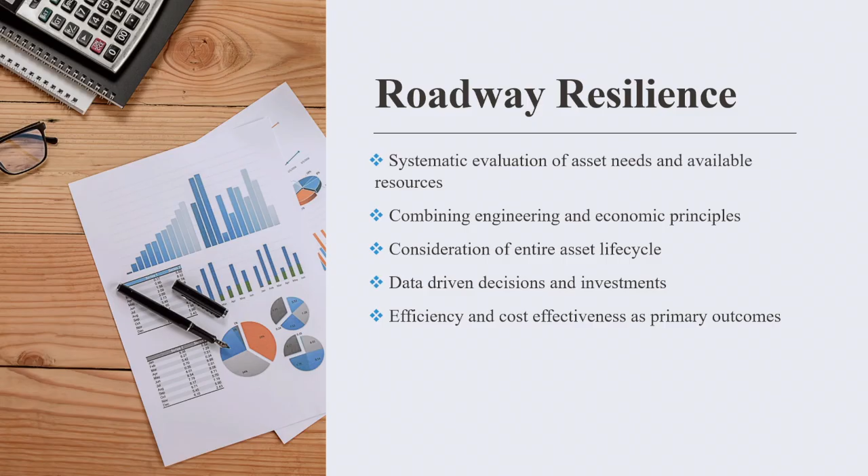Rationale for preservation, and I'll mention in a minute what's the correlation between preservation and maintenance versus resilience. But generally speaking, on the life cycle, as I stated, resilience is related to life cycle. So initial design is not the only factor, as I just mentioned. Quality control is not the only factor. We have to add any intervention that happens during the life cycle.

So basically, we are trying to achieve the highest possible service level, ensure that the funds available are used in preventative actions, not only corrective. That is what we talked about yesterday, and in the next presentation after this one, we will be talking about different types of preventative actions and their impact on the roadway network.

Timely action, again, as I said, one of the main advantages of pavement management systems or bridge management systems or asset management systems is giving us the ability to take the right decision at the right time. I mentioned earlier, yesterday or the day before, the right decision being delayed, right? So take the action while the damage is still minor.

Okay, types of maintenance, and again, the next presentation will be dedicated only to one type, which is preservation, but in our roadways, we have some of the normal routine maintenance, removal of debris. Somebody might say, okay, how is this related? This is a very simple thing. But you tell me, what do you think the non-removal of debris can do to impact long-term performance or even reduce the resilience of our road network? Anybody think of something here?

Perfect. Very smart. That is the major thing. Actually, 2 years ago, I did a project on how to optimize drainage for bridge decks. They started with bridge decks because they're very small, so they can control them faster than lengthy highways. And also the blockage of drains on bridges is even more scary because its impact will be immediate hydroplaning. The water has nowhere to go.

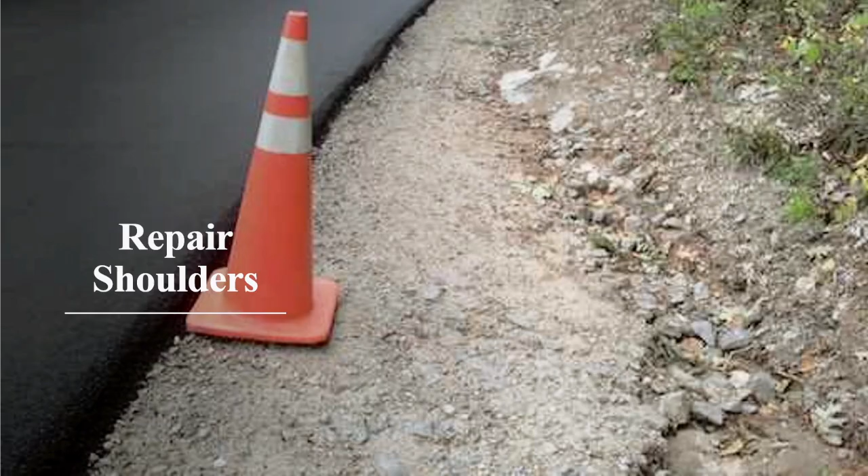So having a thicker layer of water on the bridge decks means hydroplaning, means accidents. So blockage of drainage is one major thing. So clearing the drains of the road network is one important activity. The repairs of shoulders. What can this do if you ignore the shoulders? Huh? The road will?

Perfect. One of the pictures for part of what happened yesterday, because there are two damages that happened yesterday, is relevant to the shoulder, ignoring the shoulder repair. They invested so much in the highway, but ignoring the shoulder, with some excessive rain, literally the road is gone. So, what year? It was like 2 years ago. Yeah, I'll show you the picture. I'll show you how the asphalt is brand new.

Now, that's what I'm saying. Somebody will be under fire in North Carolina in the next few days. I'm really watching what's happening in the news because taxpayers in America take it seriously. It's like, we're paying a lot of taxes, you're using them to create some infrastructure, and this is a major road, and it's eroded, or it collapsed.

Patching of potholes. Potholes in themselves are an indication of very poor preservation because you hardly see a pothole evolving immediately. The very first start is either a longitudinal crack or a transverse crack. And then it starts to develop hair cracks left and right, like a cobweb. And then not only this, it grows, so it's an alligator crack. And then not only this, you leave it for cyclic loading and fatigue, so the asphalt starts to pop. That is when the pothole shows.

So a pothole indicates that you ignored hair cracks, you ignored the expansion of the hair cracks, you ignored the alligator cracks until it developed. So it has been giving you signs and warnings, and nobody is listening. So this is one bad thing. And in the US, what scares them the most is ruts, which come after the potholes, because of safety, especially with very fast speed or high speed.

Cracks, as I said, are the first step to the formation of potholes. So the sealing of the cracks. Now this one, if ignored, as I said, will grow into further damage. And as we will see in the next presentation, sealing cracks is the first step. It's still considered under preservation because according to the FHWA definition, preservation would include any activity that does not increase

the capacity. And they're very precise about this because the pool of money they spend to do preservation is different than the pool of money they spend to do maintenance or repairs. So they have to define concisely what activities fall under preservation, so they know where to get the money from, and what activities fall under maintenance to get the money from this other pool.

So sealing of cracks is considered a surface treatment and a stage 1 into the routine maintenance, or, to put it a better way, routine maintenance is under preservation. The term is maintenance, but because it's routinely done, it does not include any increase in the capacity. So it falls under preservation.

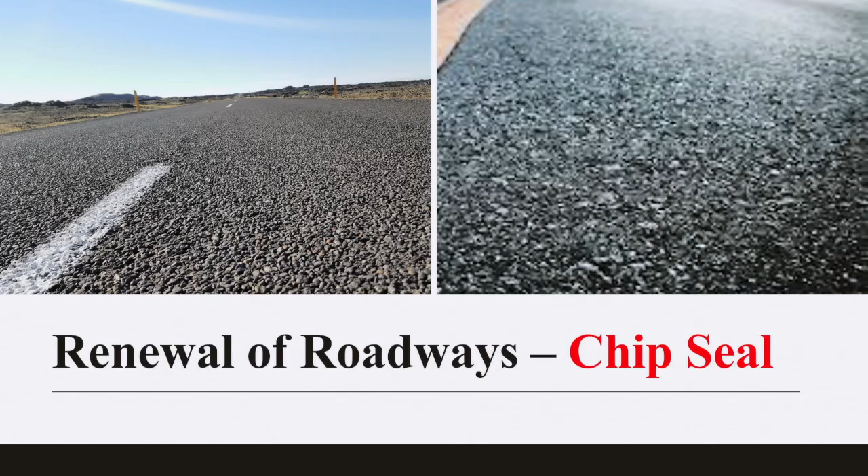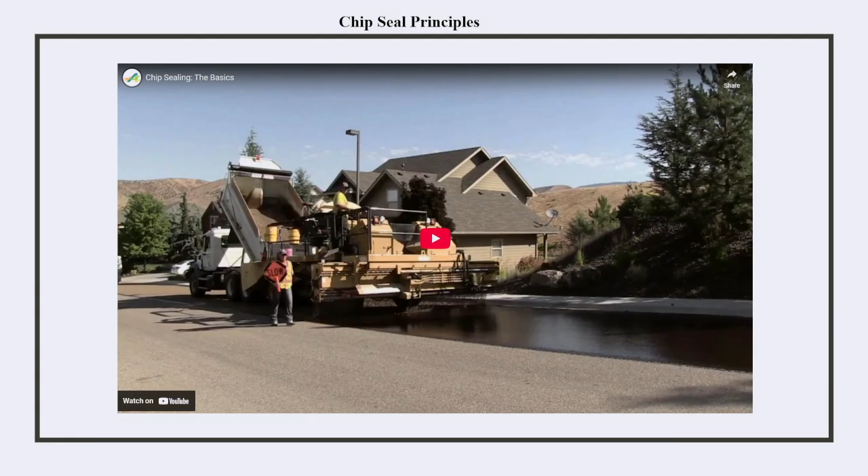Now, other types of maintenance: renewal of roadways or road surface, chip seal. If you guys can play the chip seal video, that will be good. It's actually repeated in the next presentation, so if we can't do it now, we can still... okay, that's good. So watch this one. I got a couple of questions yesterday about chip sealing, side questions.

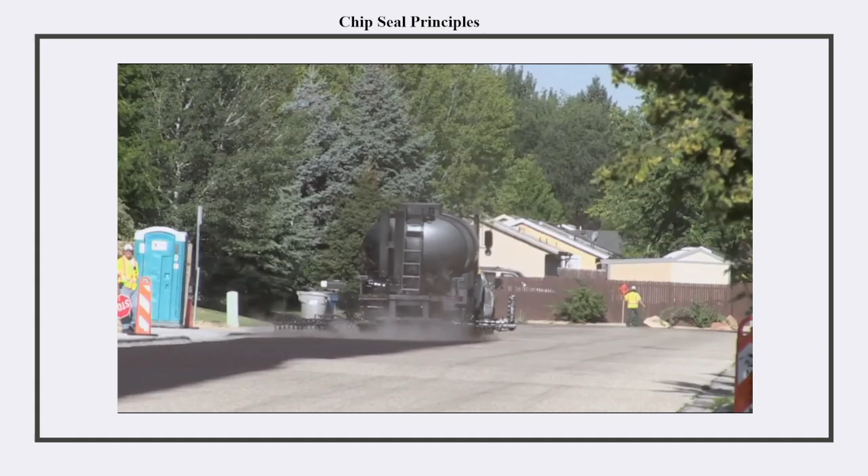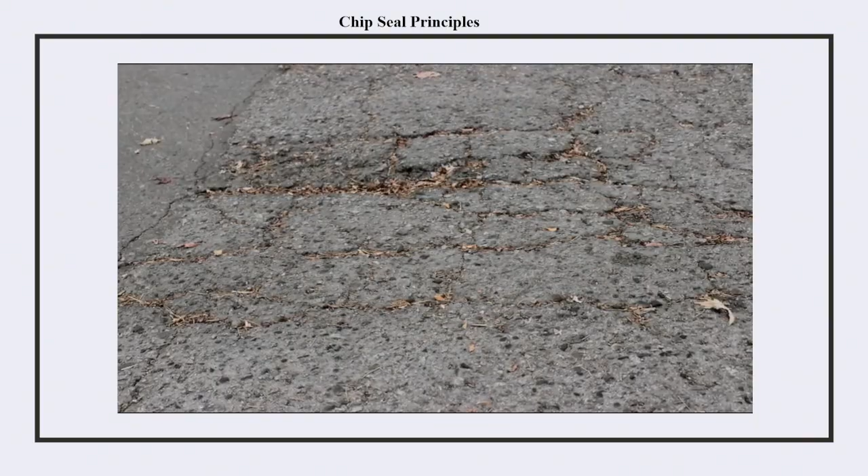Is this an evil conspiracy? What is chip sealing? Why does the Ada County Highway District continue to torment us? You usually find this unwelcome summer ritual sign on your door before they go chip seal your streets. Asphalt is like a protective skin covering our streets. Without treatment, it begins to decay from the effects of sun, weather, and traffic. It loses its elasticity, becoming brittle and cracked.

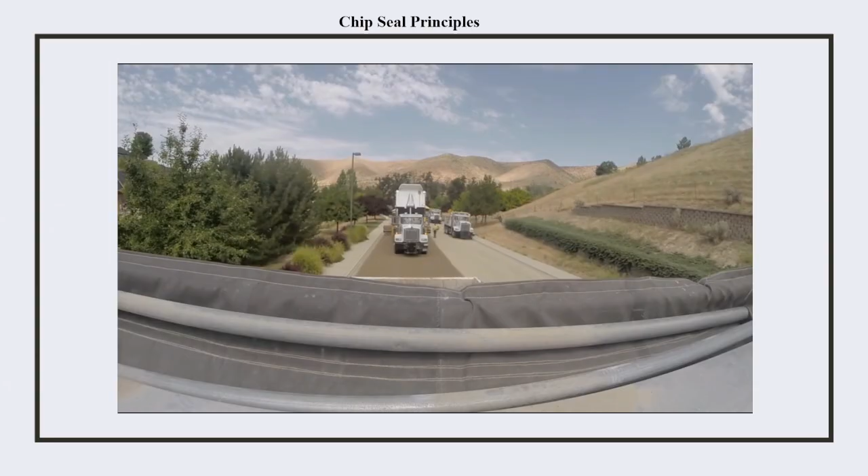Chip sealing provides an armor coating that renews the surface of the road, extending its life for an average of over 6 years. And here's the best part. Chip sealing costs 1/10 of the price compared to an asphalt overlay, and it keeps the road in good driving condition. An overlay, essentially a new layer of blacktop, is required when a road surface fails, something that will occur in about 20 years without maintenance.

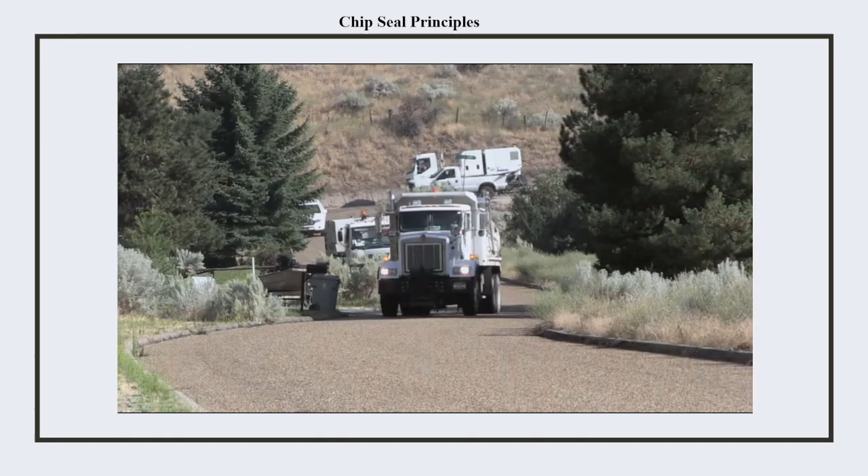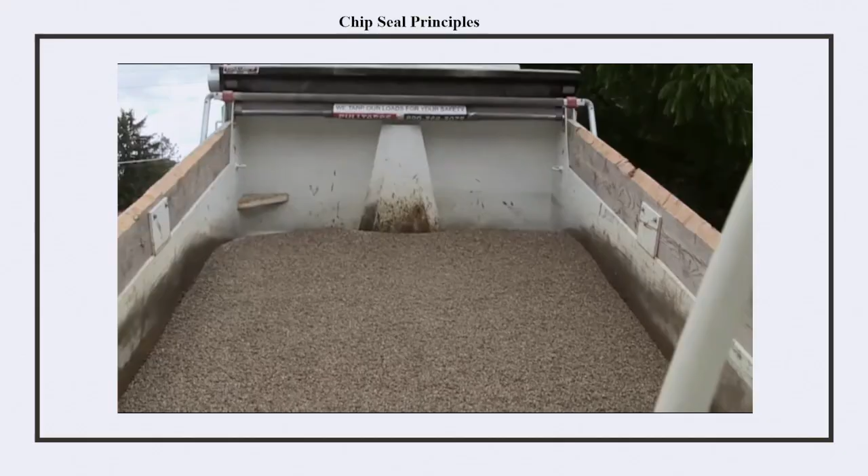These are the chips, 1/4 to 3/8 of an inch diameter coarse aggregate. Every summer, ACHD chip seal crews go into one of 6 areas to identify which roads need to be chip sealed. In the spring, workers repair potholes and seal cracks. They notify neighbors and businesses in the designated areas of upcoming plans to chip seal. Property owners with large trees near the street must provide 14 feet of vertical clearance above the pavement for maintenance equipment. If trees need pruning, ACHD typically gives residents 2 months' notice. They'll ask residents to refrain from parking on the street during the process and to drive slowly on the newly sealed surface.

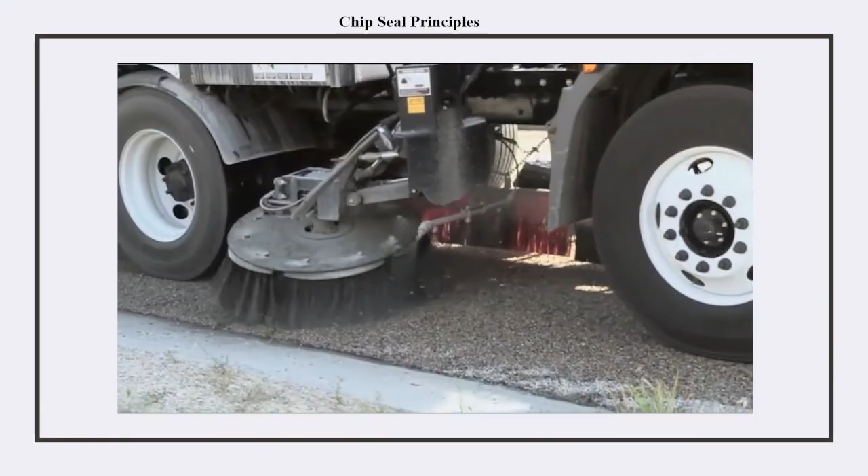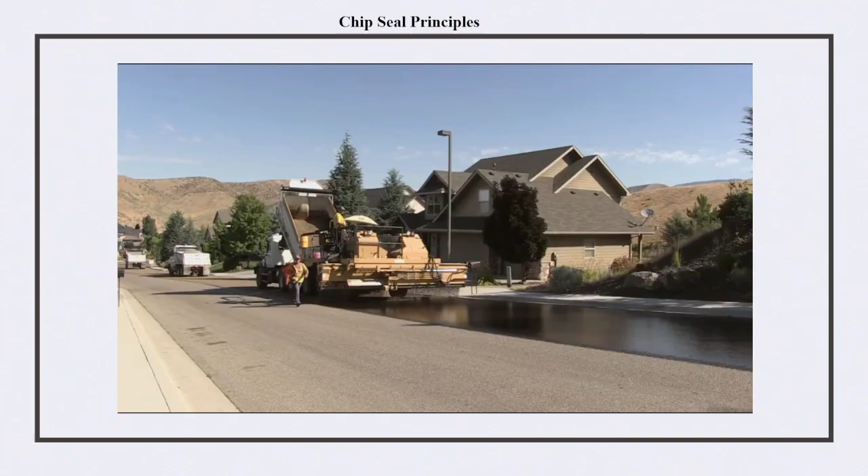If vehicles stop or start abruptly on a fresh chip seal surface, they will remove the driving surface of rock and the oil sealant underneath. Those spots cannot be repaired. Once it's done, it's done. After repairing potholes, workers sweep the road clear of debris. Then an asphalt distributor truck shoots 1 lane at a time with hot liquid asphalt between 140 and 180 degrees Fahrenheit. Immediately after, the chip spreader follows to embed the chips while the asphalt is fluid. Next, rubber tire rollers make 2 to 4 passes to set the rock into the oil.

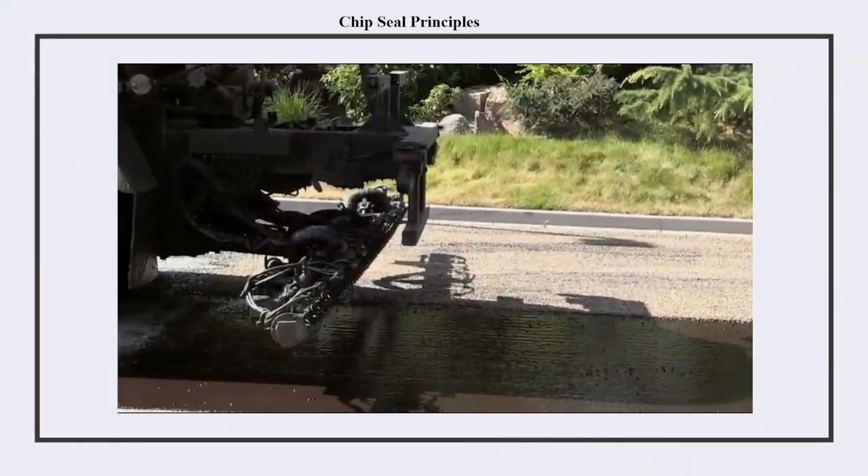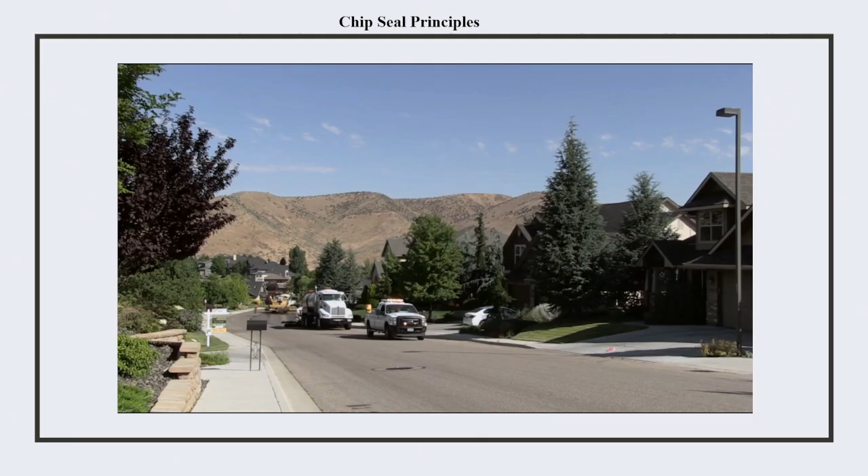After completion of the first lane, they proceed to the second lane with the same treatment. Within a week, a sweeper comes through to clear excess rock and dust. Later, a thin fog coat of oil seals the new surface in place, reducing dust and securing the rocks. This adds life to the chip-sealed surface. Motorists can drive on a newly chip-sealed surface within minutes and on a newly fog-sealed surface within a half hour.

Within weeks of the fog coat, crews come through to paint stripes on streets and crosswalks, creating the look and feel of a brand new roadway at a fraction of the cost. The chip seal process is continually reviewed, then revised and updated according to input from the public and as innovations and new products become available.

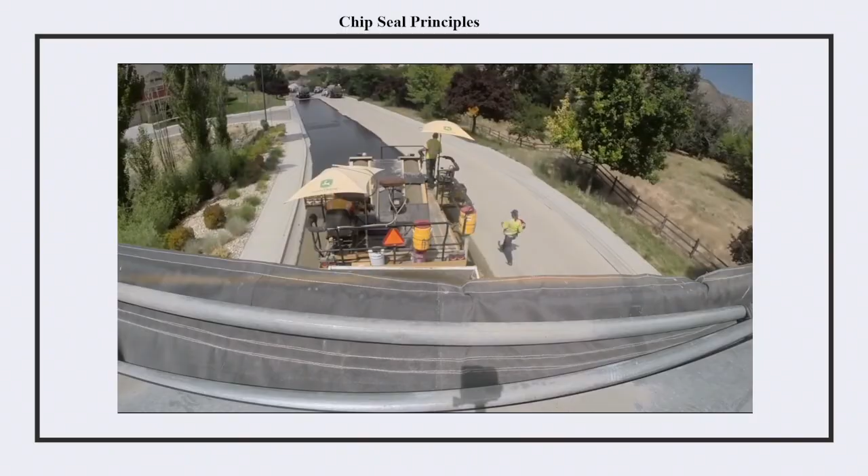We use a latex modified oil which sets up within minutes, allowing us to open the road very quickly. Our program has developed a lot over the years. We use a 3/8" chip size on the main roadways as it provides a longer wearing surface for traffic. But we use a 1/4" size on residential streets so it's smoother for skateboards and bicycles. The chip seal process has a lot of moving parts. It's a constant process of watching what we're doing out there and making adjustments as needed.

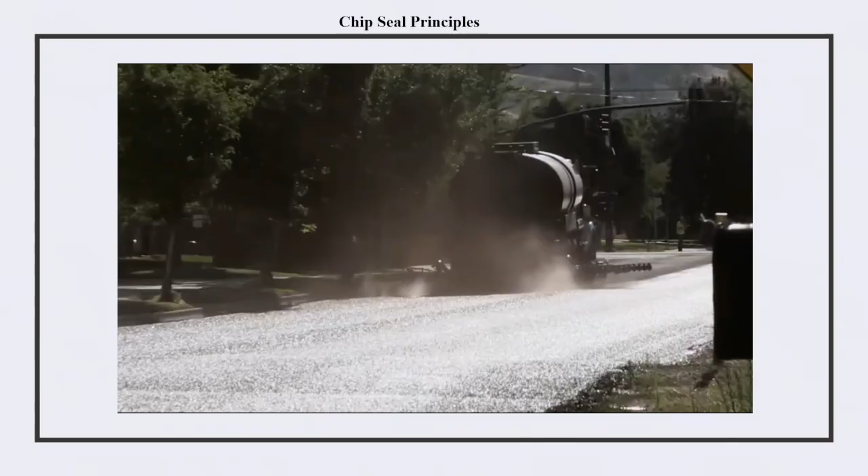As we strive to make improvements to the chip seal process, ACHD welcomes your input and feedback. We know the drawbacks. Chip sealing is messy and inconvenient. Chip-sealed streets are bumpy for skaters and scooters. We have switched to smaller chips to help prevent windshield damage and to make a better surface for cyclists. The alternatives to chip sealing? Let roads deteriorate into cracks and potholes over 20 years, then go through the costly process of new asphalt overlays. No other road treatment offers the tremendous economical savings and minimal inconvenience of chip sealing.

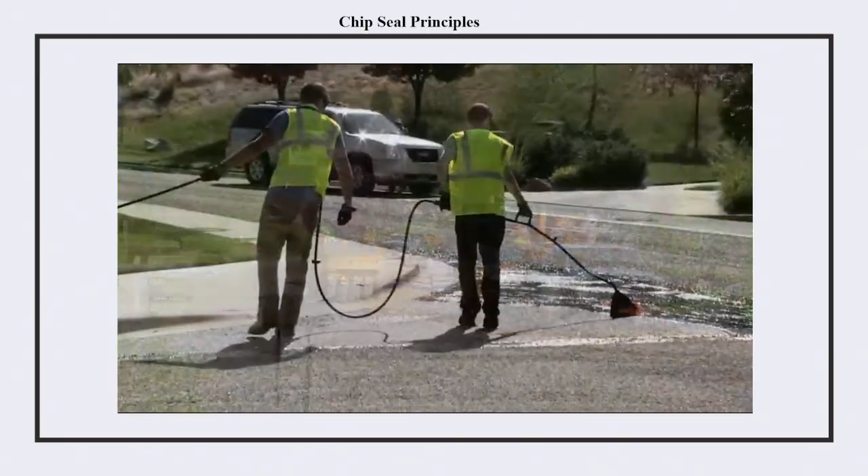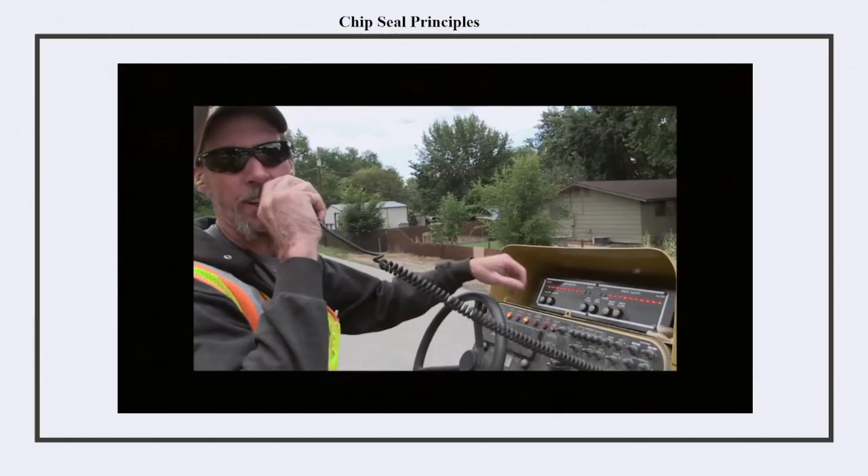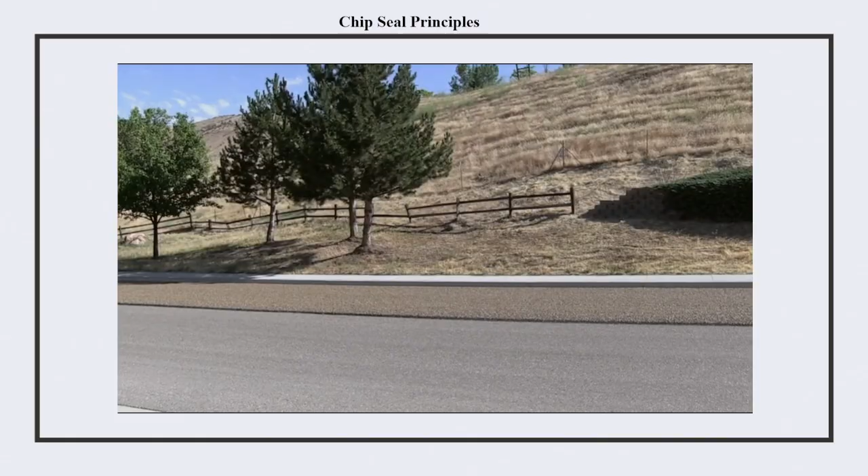Although we maintain nearly 5,000 lane miles of roadway throughout Ada County, ACHD's primary commitment involves much more. A commitment to safety, to high-quality results, a commitment to service, and to you, the customer. Chip sealing saves you money and produces a great result. We understand if you don't like it at the time of placement, but we do think you'll like spending less tax dollars to keep your roads in better shape. It is important to us at ACHD that the public realizes the benefits that chip sealing provides for our streets, and to please be patient with us as we come through your neighborhood. A little understanding goes a long way, and we'll get out of your way as soon as possible. We thank you for your patience and cooperation.

Okay, so what is the target of this whole procedure? Think about what they have done. Did you follow the exact process here? What was done? So if you tell me this is reactive maintenance, no, it is a preservation. Why is this considered a preservation? Well, first of all, it happens every summer. It never increases the original design capacity of the highways.

So what happens here, with time, you start to see a little raveling, it expands, you might see a little bit of cracks, so your PCI or PCR, pavement condition index or pavement condition rating, starts to drop. The more the deterioration, the higher the drop. Until a specific point after which it's no longer preservation, it has to be maintenance, and if delayed more, it will be a replacement.

So in the very early levels of drop, where you are still above 70 or 75%, between 75 and 100, you have some signs of deterioration like raveling or minor cracks. If every once in a while you find a bigger crack or a pothole, you have to treat it independently. As you have seen, they said before chip sealing, you have to have crack sealing or patching of potholes. Because with this chip seal, the whole added layer is in the neighborhood of 1 inch. So if you have any extensive cracks or deep cracks or wide cracks or potholes, this is not going to be enough to fix them.

So you seal the cracks and patch the potholes, then you start the process of chip sealing. Now, how the process is done, basically they have an initial spray of what they call a fog seal, not chip seal. Fog seal is an emulsion, basically water mixed with binder and emulsifying agent. Very light. It's only done with one truck with a sprayer. It basically smooths the surface.

Can we have the presentation back? Oops. No.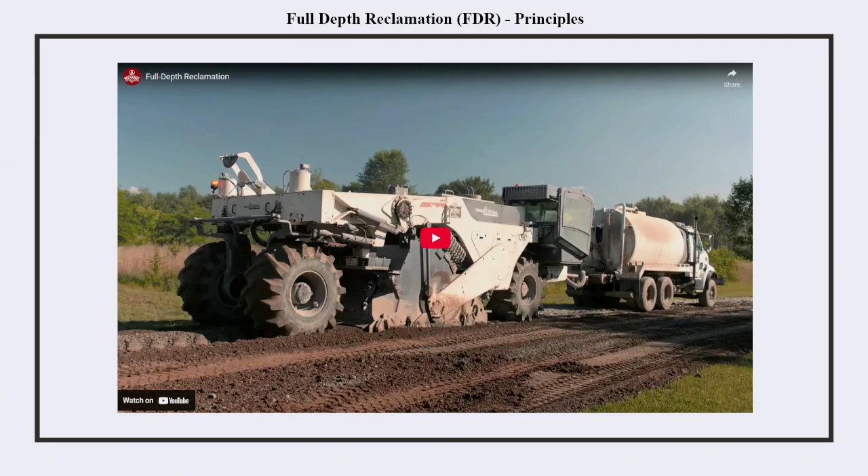Now, full depth reclamation, we talked about this one before and how it is made. Here is another quick video. I hope we can play it. This one is basically trying to reduce any impacts because of poorer subgrade.

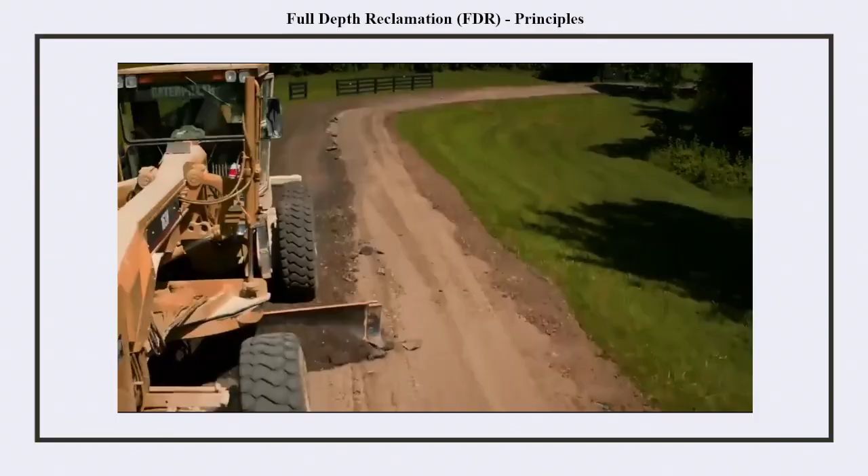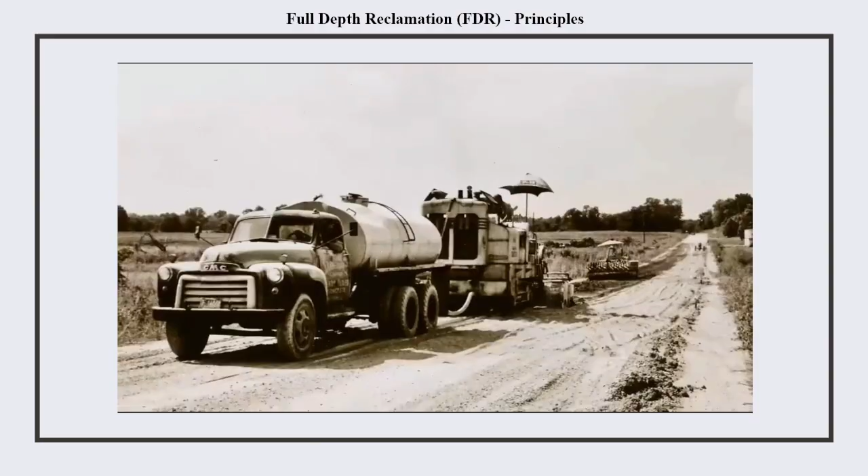Full depth reclamation, or FDR, is an asphalt recycling process where the full flexible pavement section and a portion of the underlying materials are uniformly pulverized in place, then stabilized with Portland cement. The result is a cement-stabilized base course, using all existing materials to create a much stronger, stiffer, and more durable section for the new pavement or surface layer. FDR is a cost-effective, fast, and more environmentally friendly alternative to total reconstruction. FDR is how Mount Carmel Stabilization Group began in 1949, and today we do over 100 miles per year.

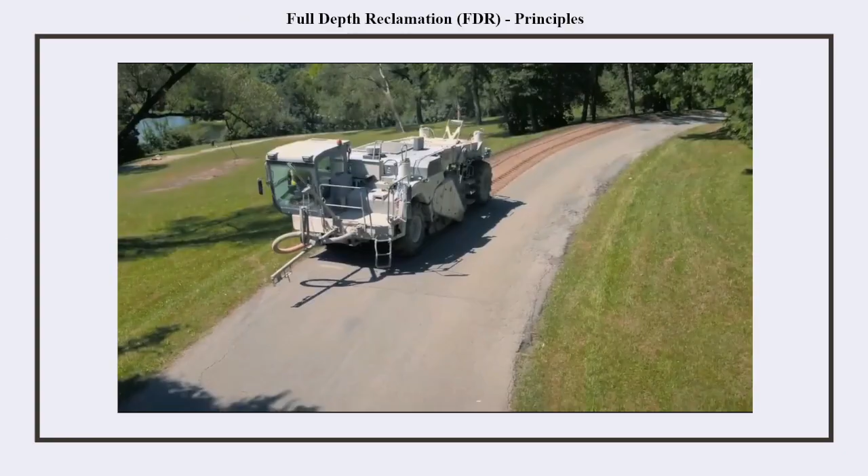This roadway is exhibiting common base failure, with alligator cracking, full-depth patches, edge failures, etc. The city of Louisville, Kentucky elected to use full-depth reclamation to rebuild this road because it was superior to patching and far more cost-effective than total reconstruction. This roadway is a great example of FDR because no materials left the roadway during construction. The first step in the FDR process is to pulverize the existing asphalt, base, and a portion of the subgrade in place to create a homogeneous material. On this project, the treatment depth was 8 inches. Depending on the project, treatment depths from 6 inches to 16 inches are common.

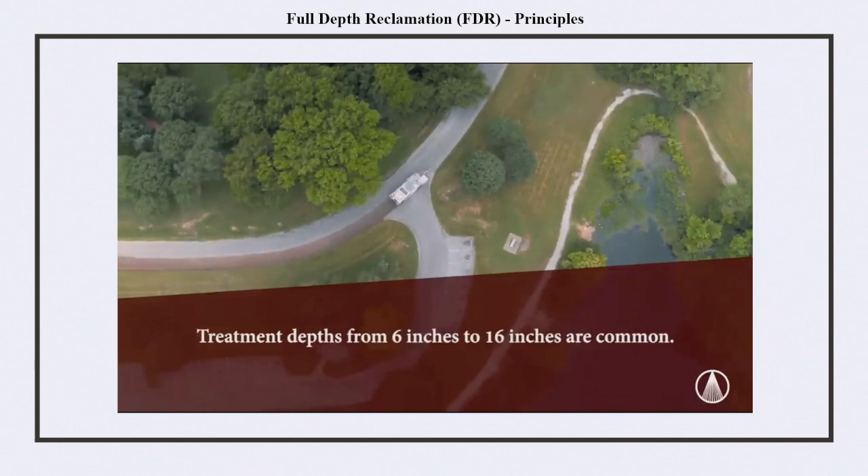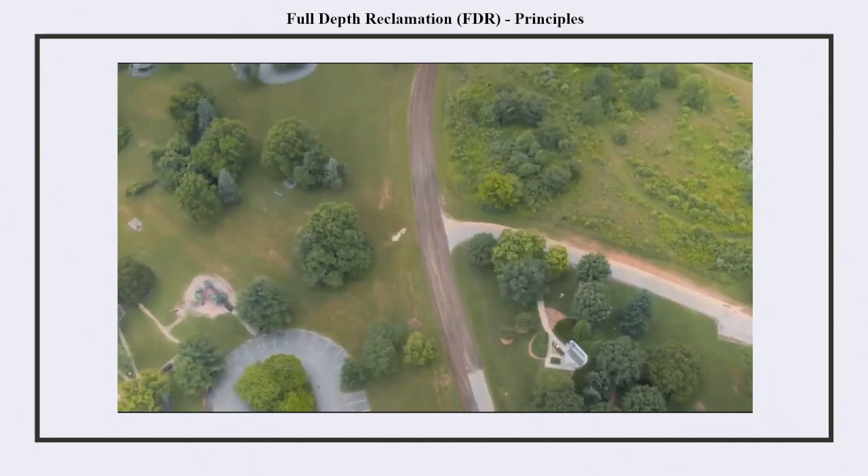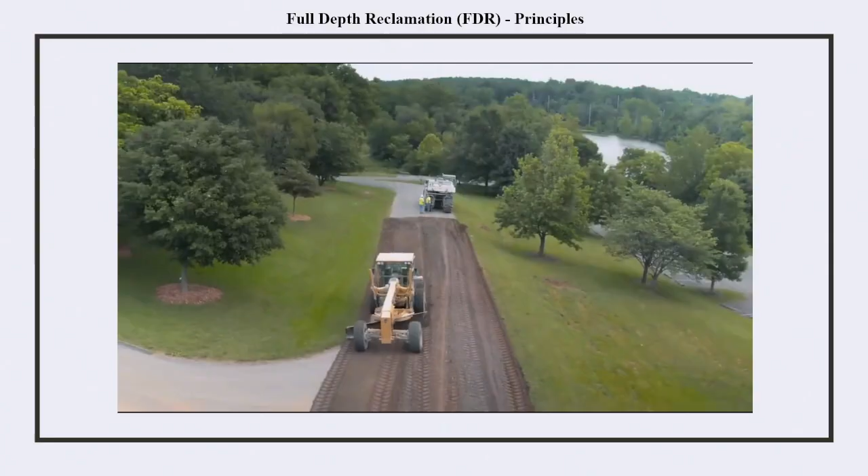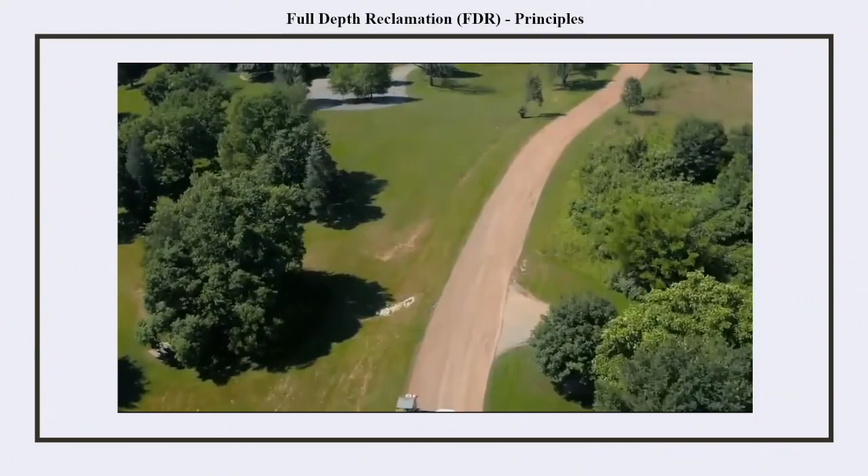During this phase, the mixer is pulverizing the full depth of treatment. The gradation of the pulverized material is important during this phase. Typical specifications are 100% less than 2 inches. It is during the pulverization phase that any widening and reshaping takes place. This is important to have completed prior to the beginning of stabilization. Widening is easily accomplished during pulverization if the existing roadway platform includes a shoulder on either or both sides of the road. After pulverizing, the material is graded and sealed prior to stabilization.

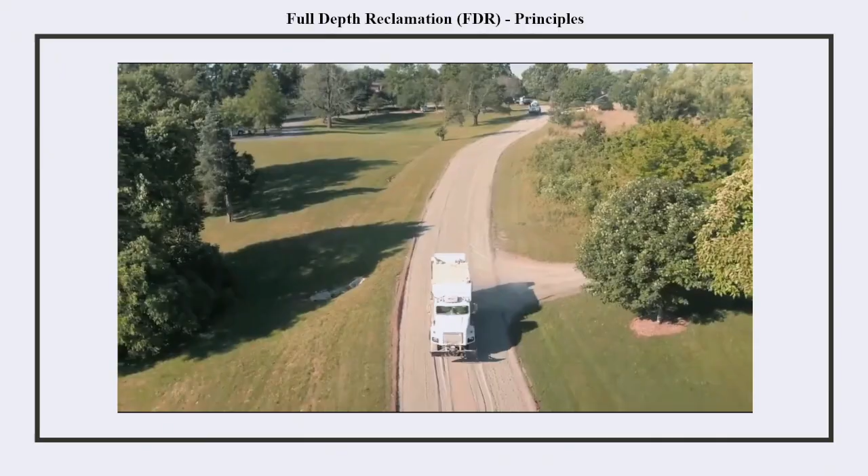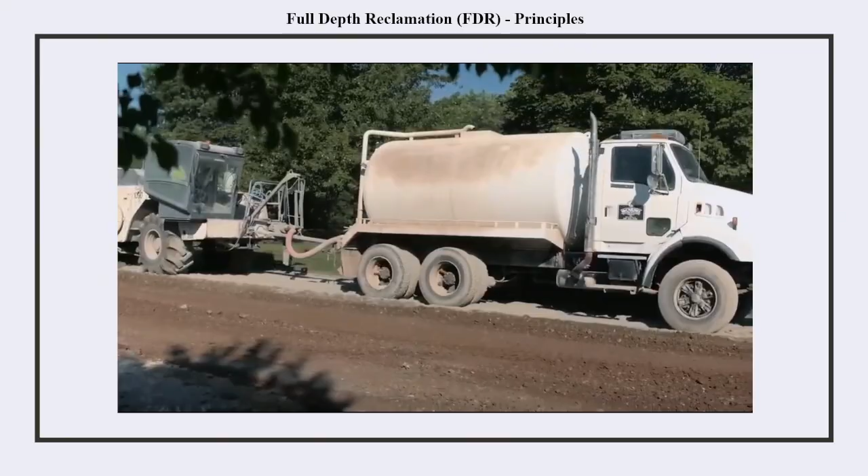Phase 2, stabilization with cement begins. The first step in stabilization is the application of cement on the grade. Cement is spread at the prescribed application rate, taking into account the new composite soil weight. On this project, the cement application rate was 6%, which is a common and effective application rate for FDR with cement. The cement is mixed with the composite base to the full depth of treatment, with water being added through the mixing drum to hydrate the cement and bring the mixture to optimum moisture content.

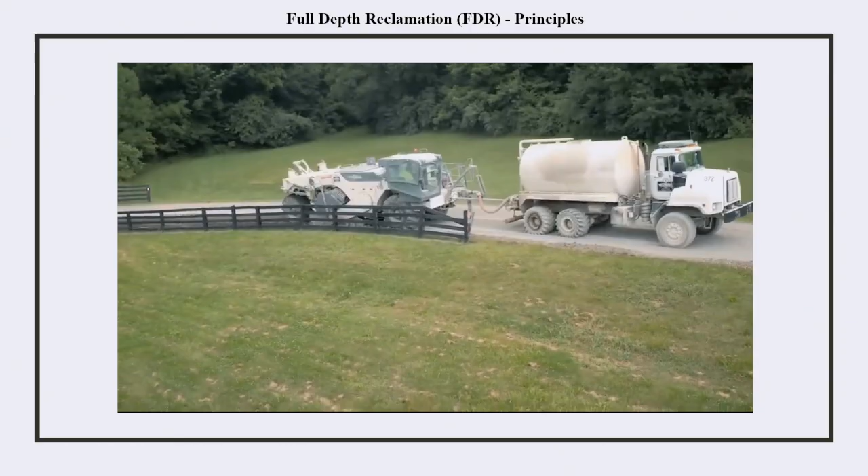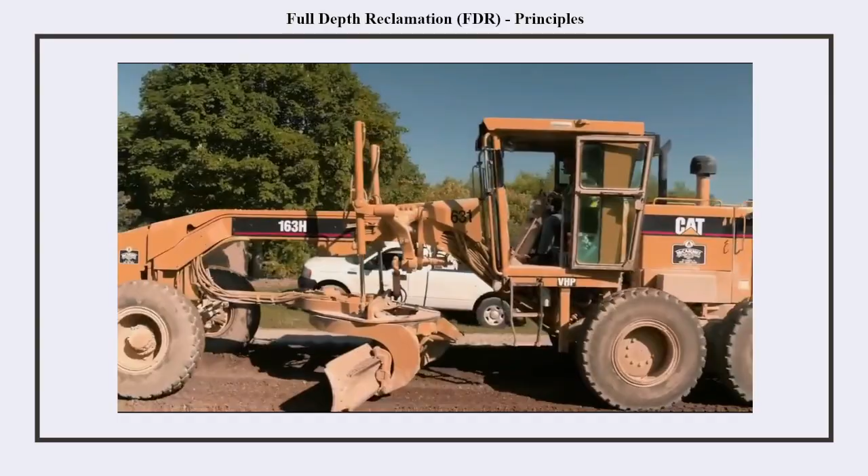Immediately behind the mixing process, the process continues with compaction and initial grading. Compaction is accomplished with a vibratory pad foot roller, followed by finish grading and sealing with a steel wheel roller to provide the finished stabilized base surface.

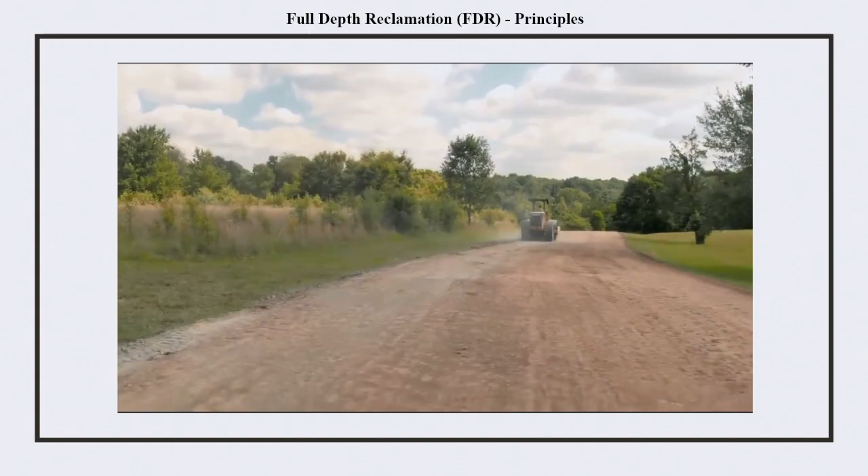At this point, the roadway is completely open to light vehicular traffic. Heavy loads should remain off the road for 5 to 7 days to allow the cement stabilized layer to cure. It is also common to shoot a bituminous tack coat on the roadway to seal the surface prior to paving.

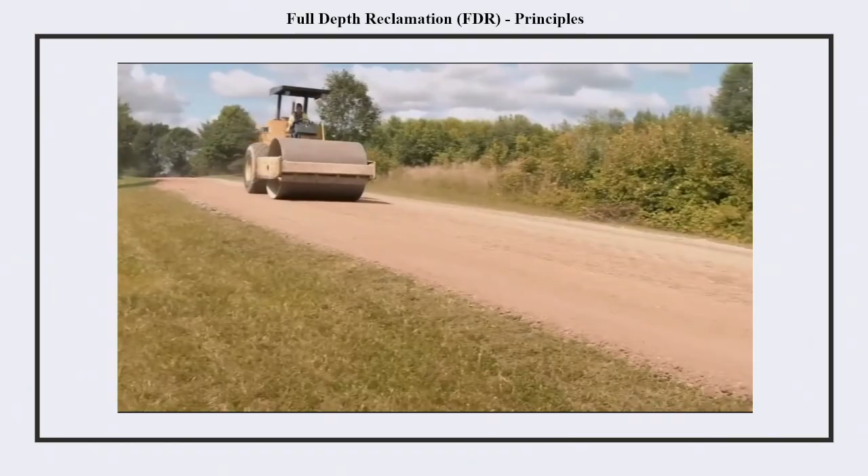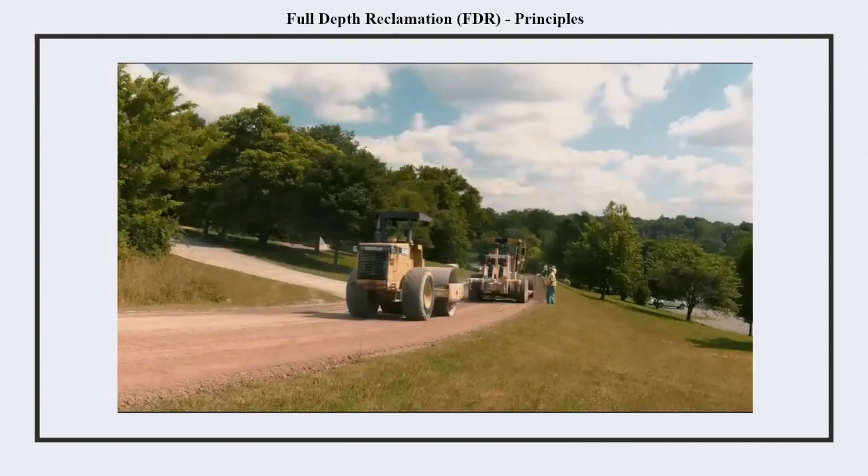Okay, so before I proceed after the FDR, I just wanted to mention one thing on chip seals, the previous topic. The process you have seen of chip sealing is of an existing roadway. Typically, these could be collectors, arterials, even expressways or interstates. However, low volume roads have a lion's share of enhancing the resilience by chip seals. Can anybody think of how that is done?

By definition, what's a low volume road in Nigeria? Do you have a specific national definition? Less than? Okay. LVR, yes. But is there a cutoff number? I heard 300 here. Yeah, I'm not aware of a national standard in the US.

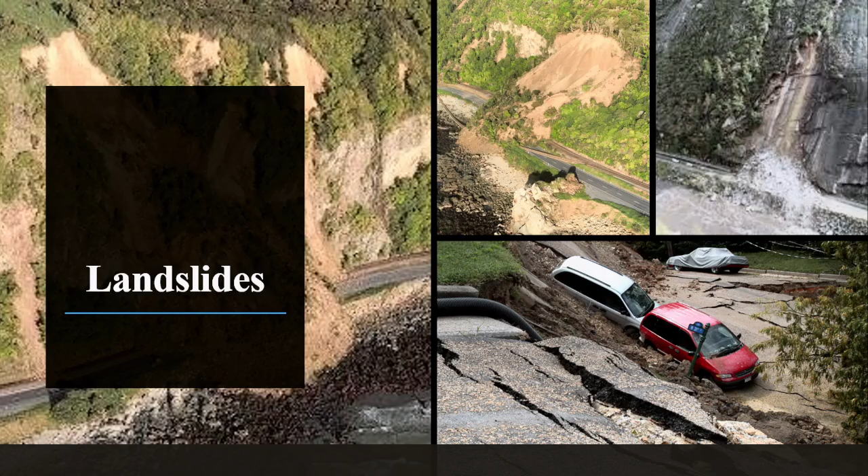Basically, it's borderline between preservation and new construction, because you are still maintaining the capacity. There is a huge debate about whether it can fall under some sort of severe maintenance. I personally see it as maintenance, not preservation, but either way, that's a political debate about where to get the funding from. But we can see how that will enhance the capacity of our roadway network.

Now to some emergency. These are real pictures that we see, and it's not uncommon. I'll show you the pictures my son sent to me at midnight yesterday towards the end. So it's very real, and it is less than an hour drive from my house. Landslides are very common in the United States, across lots of our roadway network, whether you talk about low volume roads down in the woods or up in the woods, or even the major interstates.

I used to work until 2017 in the state of Arkansas. Then I moved my whole house to the state of North Carolina. It was a 16-hour drive. I was driving a U-Haul truck, a big truck with all my furniture in it, towing my son's car. So you drive slowly because I was driving a huge, heavy thing for 16 hours. So I had a chance to stop, rest, and see the topography around me.

Between the state of Arkansas and the state of North Carolina, you have the state of Tennessee. One of the national parks there is called the Smoky Mountains, where you have the mountains and the clouds around them look like smoke. The highway you are cutting across is literally embedded within the mountains. Out of a 16-hour drive, I passed through it for 8 hours. So I saw every single type of soil support.

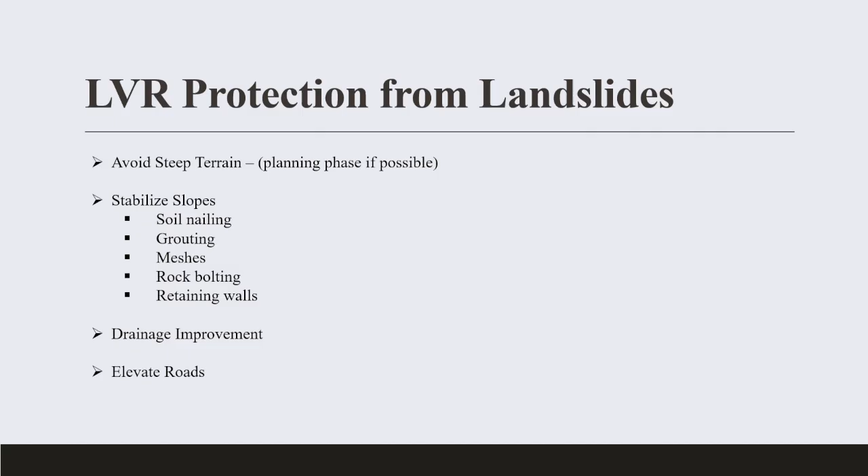But this side force multiplied by the coefficient of friction between fragmented rocks is the shear friction force that converts a horizontal force by the rebar into a vertical reaction. So this exact concept, which is used in tunnel design, could be used to prevent failure because of any erosion or any rain, and that enhances the resilience. Another thing here is drainage improvement or elevating the roads.

Yeah, so what about this? See the rock bolting, soil nailing, and grouting. Or you can have multiple techniques together. You can see the grouting on the top left. You can see the soil nailing down. You can see the rock bolting up.

And you can do rock bolting with meshes. You can do a rock bolt with a mesh and shotcrete. And this is done when the TBM results in excessive rock cracks. So bolting only may not be enough. There might be smaller sizes, because you cannot do a rock bolt every foot. It's very expensive.

So you do it, they are spaced apart on XY, it's like a grid. Between them, if the rocks are in good shape, probably bolting is enough. But in most of the cases, to secure, you end up with a rock bolt with something else. So improvement of drainage. And I'll talk on best management practices about how to improve.

So one thing to enhance the resilience in a low volume road. Do you see what I mean by this? Try always to follow the topography when you build your highway, especially in such areas. What do I mean by this? Well, there is one economic reason. If you do a highway, you want to minimize the amount of cut and fill. So if you follow the contour lines, you are basically going into the same level, right?

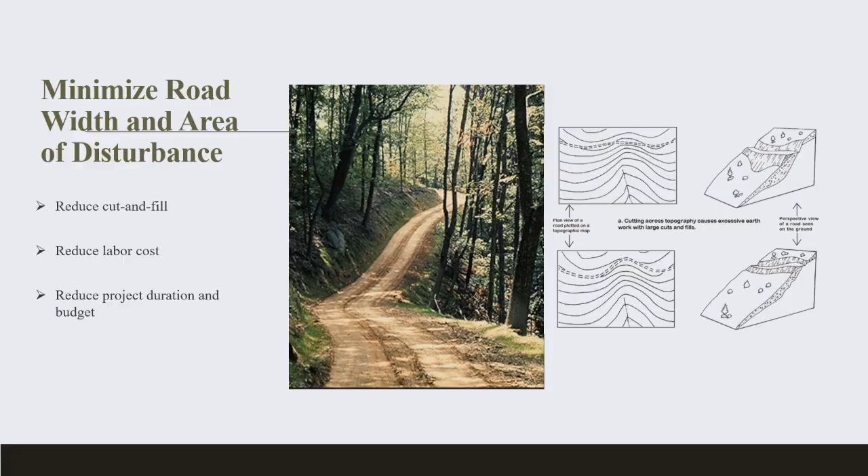And also, the drainage is not going to be appropriate. Your highway could have extensive slopes, that's for sure, but you are prone to erosion. However, the more you go, as you see in the top left, kind of parallel, that would help you when you do drainage side-wise. And that is the best when it comes to construction practice for minimization.

Now, providing adequate surface drainage. If you remember from yesterday when I asked about Manning or hydraulics, you have 3 parameters that control the speed of the flow. Do you remember them? Roughness coefficient, that's one thing. The higher the smoothness of the road, the lower the Manning value, the faster the flow would go. The slope, of course, the higher the slope, the faster the flow. And then what we call the hydraulic radius.

It's not important now because the slope and the roughness are the most important parameters. Now, generally, roughness is high in low volume roads, right? So speed tends to be reduced. So we have to take care of the slope at least to give an opportunity for proper drainage. If you have a crowned road, typically it's 3 to 5%. Less than 3% will give you a problem because of lack of drainage. More than 5%, you would expect very high speeds and erosion.

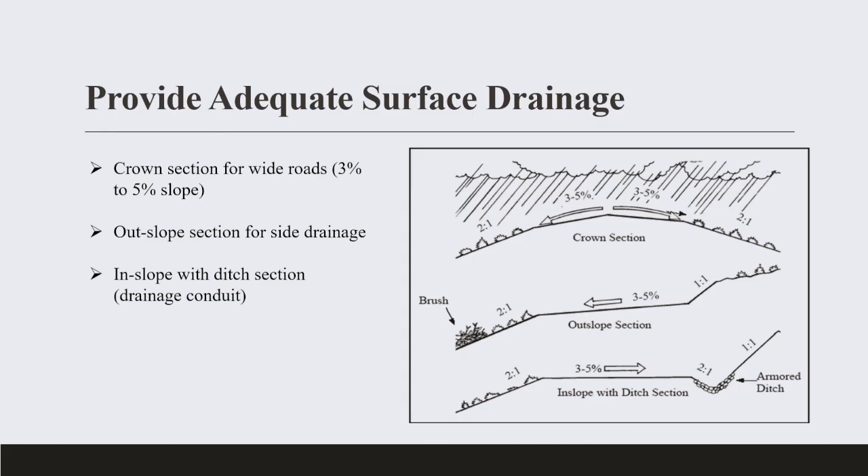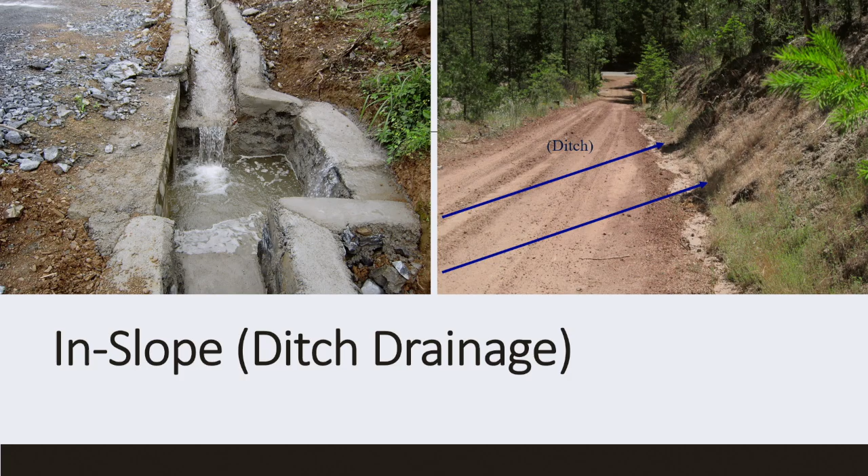Or you can do outslope like this at 3+%, or you can do inward, but when you do an inward drain, you have to watch for the fortification or armoring of the ditch. Otherwise, the drain itself will result in the road collapse. So this is what you can do. That's inward or in-slope ditch draining. So this is extremely important. If you do proper sloping with no fortification, good luck. In a few years, this water will be your enemy.

This is outslope. You have to do fortification also. Most of the time, if you have enough, a 1 to 2 slope, you end up with normal plantation. If you get closer to 1 to 1, then you have to do something, whether geotextiles or geogrids or welded reinforcement, or if you go way more vertical than 45 degrees, then possibly you have to end up with gabions or retaining walls.

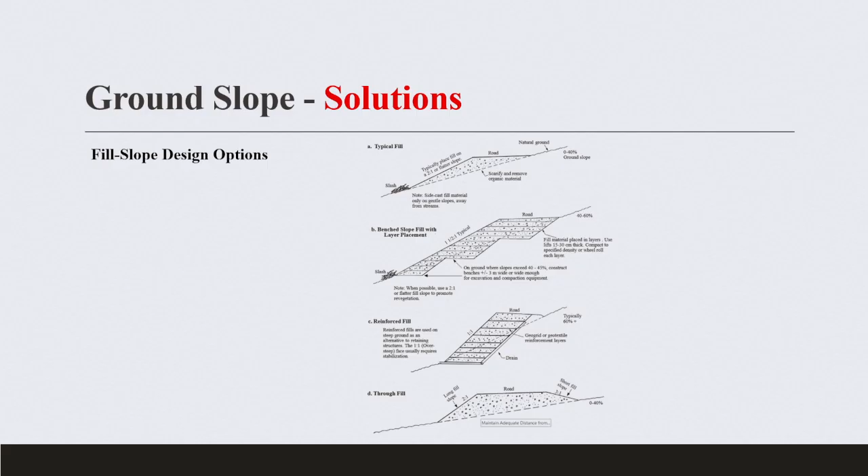Yes, sir? That grassing? Yes. So is it not considered a way of improving? You mean applying greenery? Yeah, that's what I just mentioned here, the outslope. Yeah, actually it is.

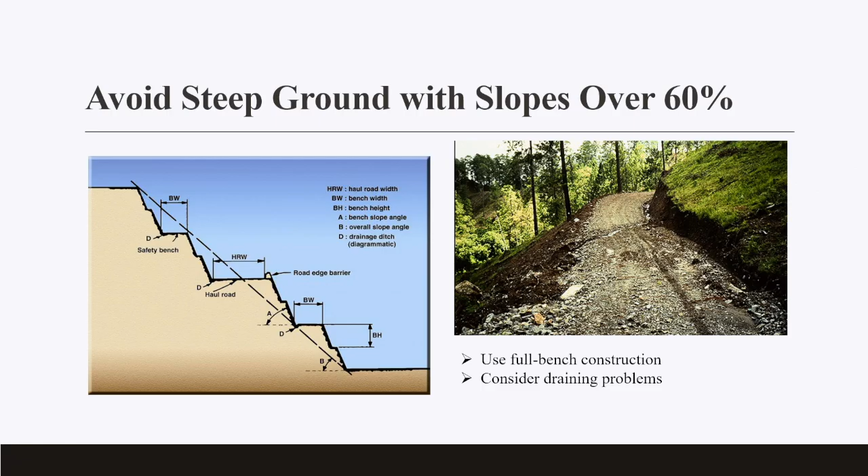Especially in North Carolina where I am, in the areas close to the Atlantic, they apply even special plants like mangroves because of how deep the roots can go. So they consider that a sort of natural soil nailing. It's very common to use greenery to support slopes.

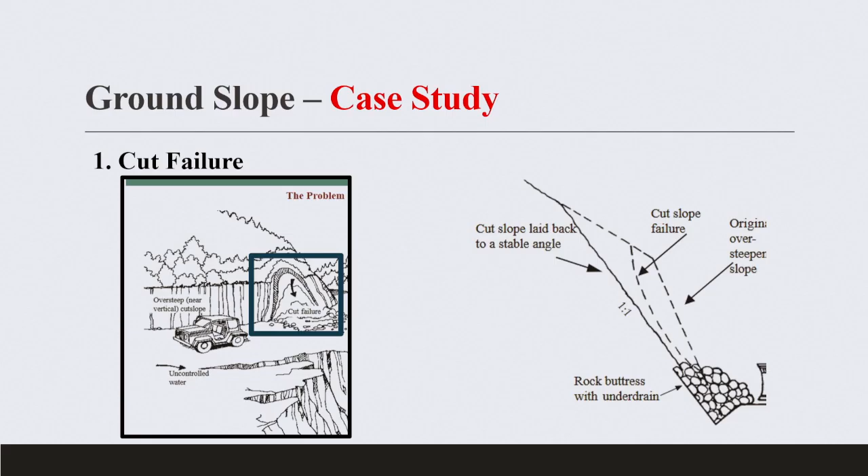Now, this is a bit of a case study, and I'm getting close to the end. This is a highway. You have two problems: one is a cut failure, and the other is a fill failure. You have some cuts and some fills, so you might end up with, see these? Two weak spots. So what can you do? First you have to reduce the slope, and then at the bottom you have to do some armoring. It is like gabions, but without the welded mesh, just sort of like riprap at the bottom.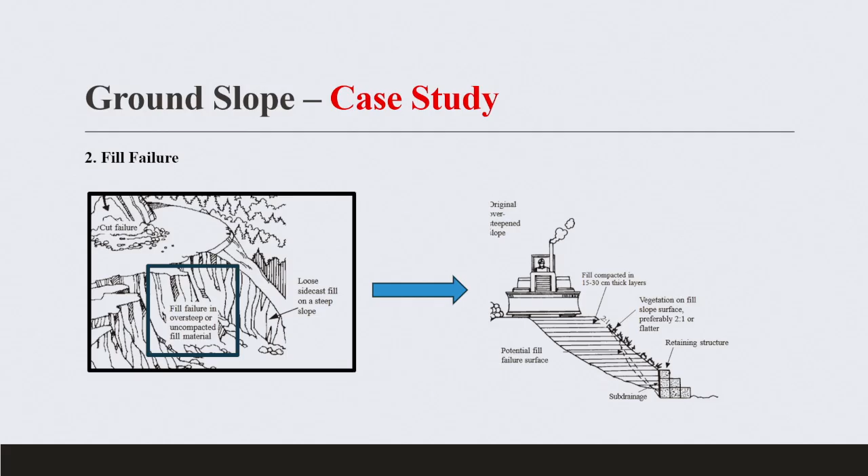This is one option. Now for the fill failure, typically you enhance the soil: either you do a lower slope and compaction in closely spaced layers, or you use geofabrics or geotextiles, or you do plantation, or soil nailing. But again, I'm talking about the easiest or cheapest, to avoid high technicality.

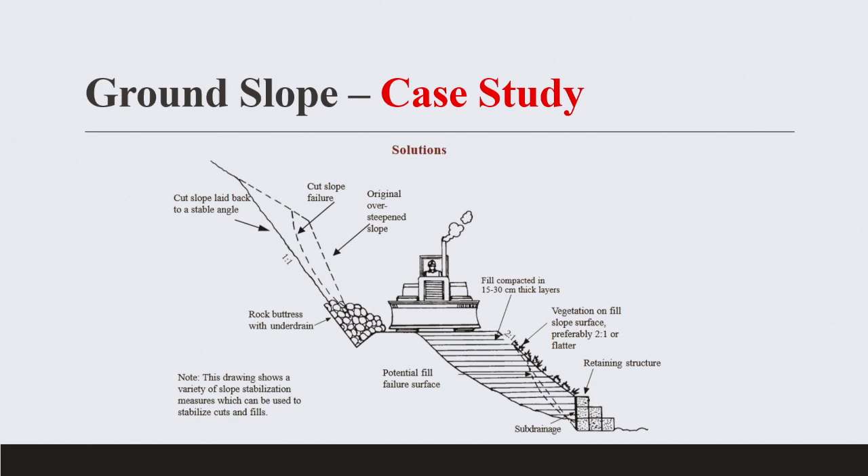So these are some pictures. Plus you have to do some fortification or armor the bottom of the slope, regardless of whether it's a failure because of a cut or a fill. You can see here they're re-sloping plus making some support at the bottom. Standard retaining walls, whether bulkhead, cantilever, or counterfort walls, are also used, but they try to minimize their use.

I'm not sure how much a retaining wall costs here, but in America, per square foot, calculated as length by depth, it goes up to sometimes $60 or $70 per square foot. A square foot is 30 centimeters by 30 centimeters, so it's extremely expensive. I'm doing a project for our DOT with a short wall, 220 feet, about 60 meters, and about 6 meters high. The initial studies, including earthwork, backfill, grading, and plantation, come to about $1.1 million. It is really expensive, so they try to avoid it.

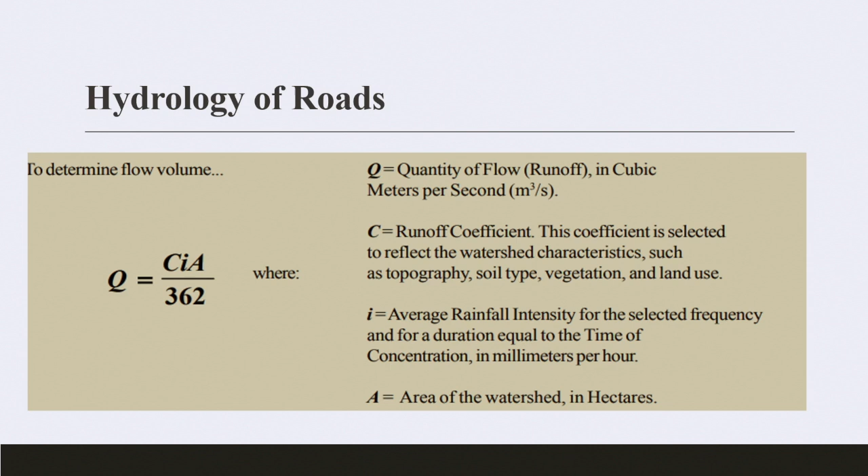Now, hydrology, this is the equation to follow: Q = CIA, not the CIA we're all afraid of. A is the area of flow, multiplied by the runoff coefficient C, multiplied by the intensity I. So I'm showing here hydrology for low volume roads, the C for different ones.

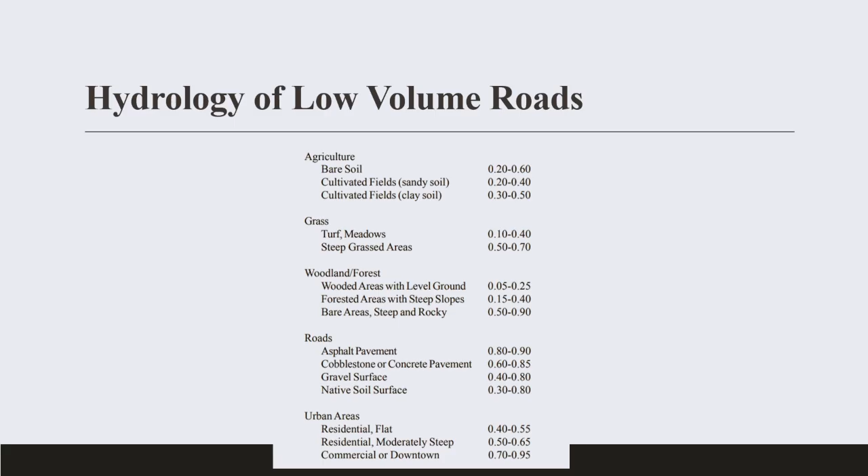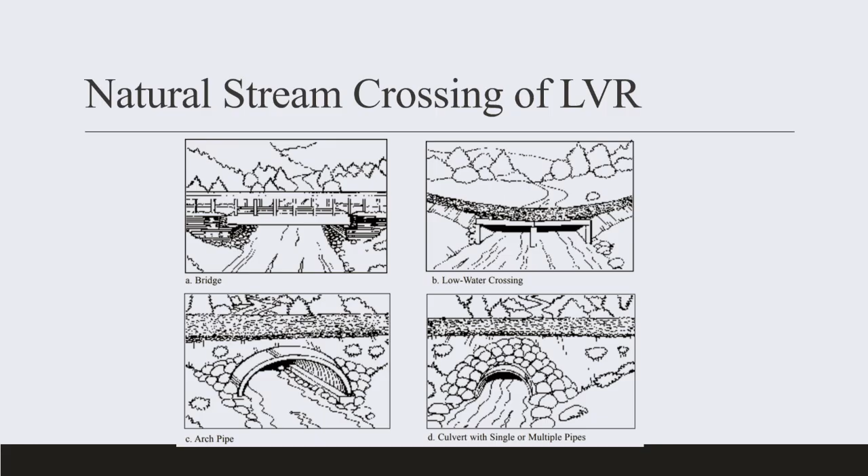Now, natural stream crossing is a big problem, and that's what made yesterday's failure in North Carolina. So you can either cross any of these ways. Now, the bottom two, which we consider culverts, by definition in the U.S., if you have less than 20 feet span, it's called a culvert, even if it's built as a bridge, right? So the top one, top left, it's considered a bridge only if it exceeds 20 feet or 6 meters. If it is less, they consider it a culvert like the ones down, as if it's a pipe,

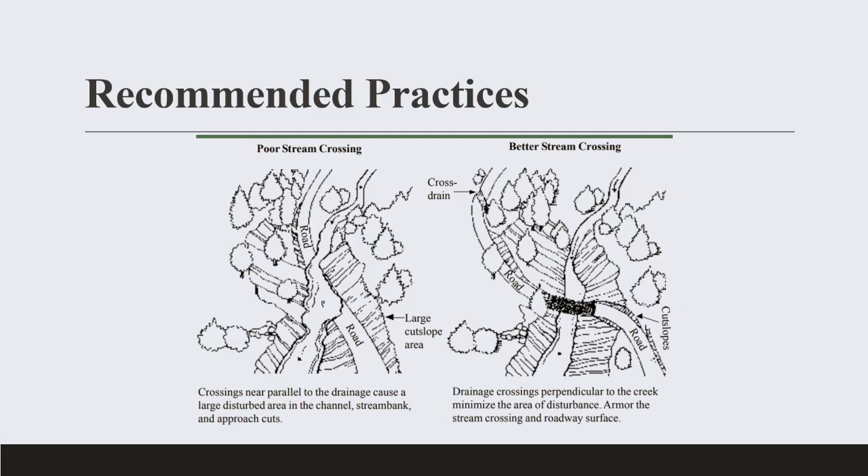even if it's a bridge. Now, natural stream crossing, you have to try to make a way out for your water, like if the cross-section is not enough. One rule of thumb is you better have the highway crossing the stream perpendicular, just to avoid erosion effect. So if you have an angle at the intersection, not 90 degrees, you have to watch for possible erosion that will happen.

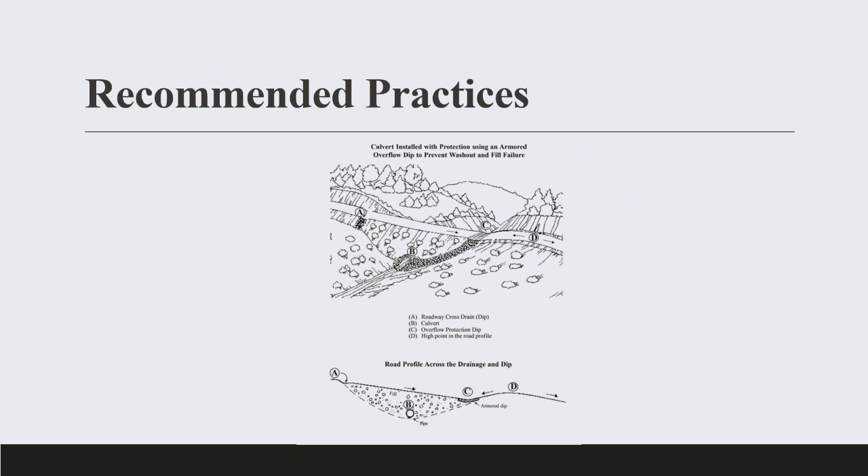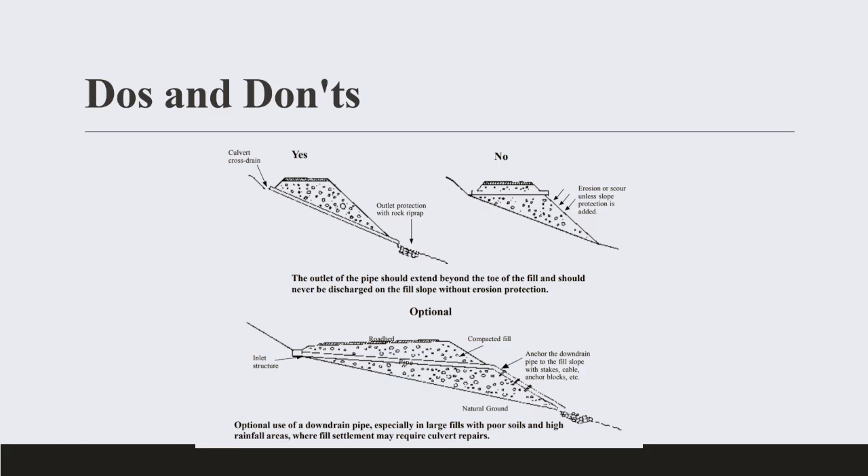highway. Do's and don'ts: if you are providing drainage across an embankment section, make sure that the spill of the drain is below the very bottom of your embankment, because once the water gets outside, there is a bit of erosion that is going to happen. So you have to extend your drainage pipe below the embankment, below the lowest point, to avoid the erosion of the highway embankment.

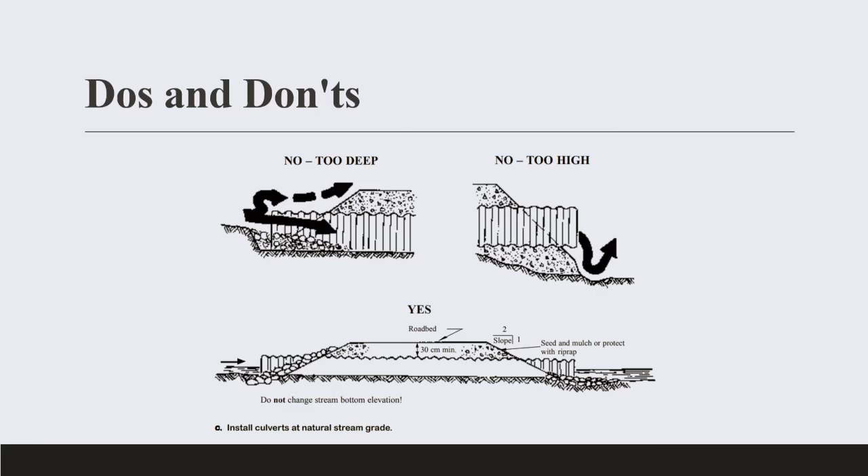Same, avoid having this thing. Do you know what the top right one is called? It's similar to what we call hydraulic jump in hydraulics. You'd have very high energy if you have the culvert dropping the water from a height like this. So it will end up with erosion at the bottom of the embankment. That would extremely reduce the resilience of your roadway. Even with normal rainfall, with time, you're done.

You have to block, make signage to stop traffic, because some people, especially those with high trucks or SUVs or 4x4 cars, think that height of water is fine, but this is running water, this is not stagnant. We just had a case in North Carolina where the guy found like 4 inches of water. He said, oh, my car is high. And he went through, the water drifted him, and he lost his life. So this is not only resilience, this is safety.

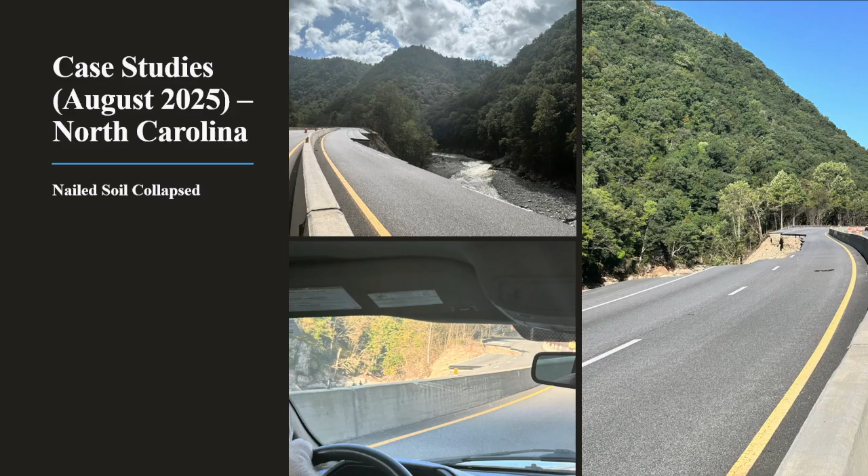And look at that. They probably invested a lot protecting from landslides, whether through plantation or soil nailing or whatever. But then the embankment itself was not well protected. So you can see the side of the road is washed into the water, right? So think about the losses due to reconstruction, and more than that, think about the losses due to stopping people from traffic. This is the one everybody uses going to the capital of the state, going to the airport; life would stop. See this? What do you think this one happened because of?

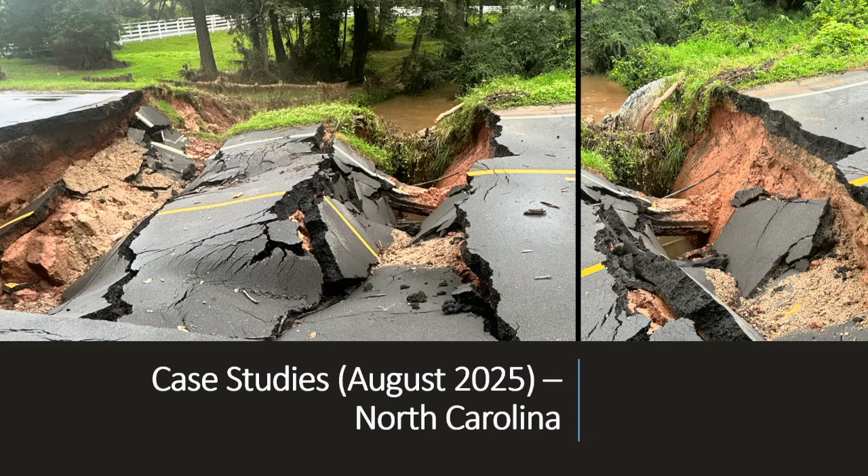Yes, sir. Yeah, thank you for the presentation. My pleasure. Just only 2 questions. Can you raise a little bit or get the mic closer? Yeah.

In the lecture delivered, it was centered majorly on climatic resilience. But resilience safety is part of what should be considered. And on the chip seal, I don't know whether you can tell us the size of the chips. Then the frictional coefficient for skid resistance compared to the surface dressing. We know that of asphalt is 0.7 to 0.8. Because when we're talking of resilience, safety should be considered.

Then the second question is on slope. I noticed that very many times we work on slope 1 to 3, slope 1 to 4, and thereabouts. But I was in a project where we filled about 70 meters, and I expected that we should be involving the geotechnical experts to look into slope stability. And that would tell us that all the methods you brought will be a guide. So I think that should be explained a little. Thank you.